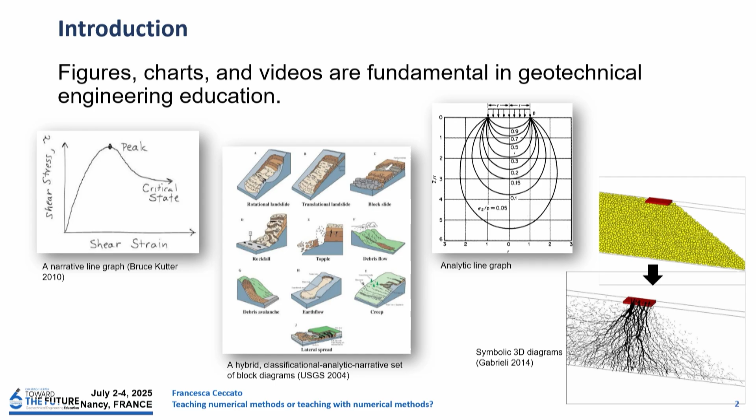Thank you very much. So I will start this talk with a question. This is a question for you, and I think we are progressing with the topic that we just saw in the previous talk. So all of us know that currently in the teaching of geomechanics, but engineering in general, figures, charts, videos are fundamental. And not all teachers are satisfied with the material they have for their lesson.

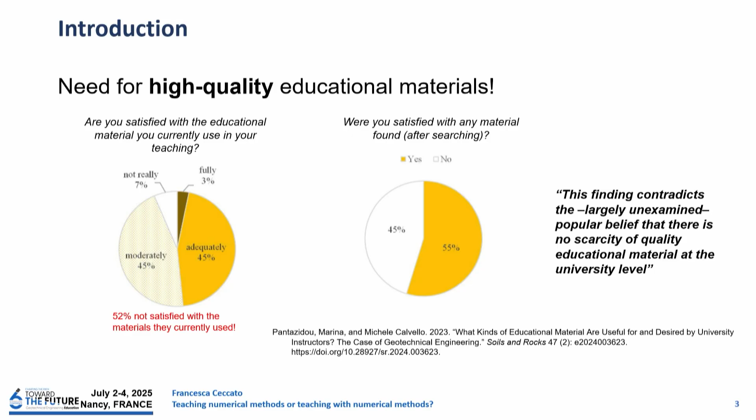Marina showed yesterday that more than 52% of the teachers are not satisfied with the educational material they have. And even after searching on the web, they cannot find useful material for their classes. So these findings contradict the popular belief that there is no scarcity of quality educational material at the university level. So we need that. So building on this, a collaborative initiative was launched between TC306, Geo-Engineering Education, and TC103, Numerical Method, to address these gaps.

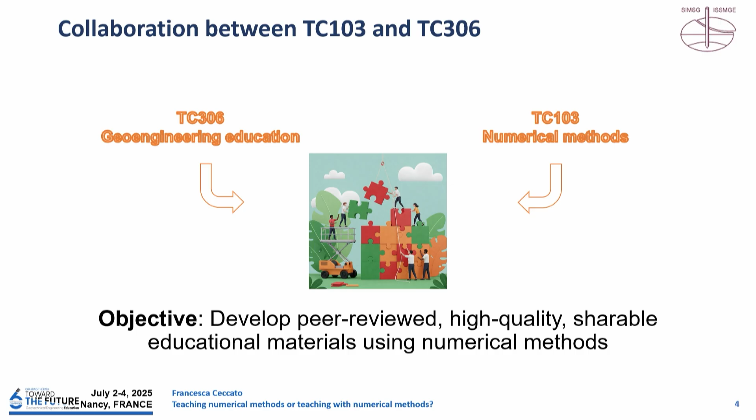So the objective is to develop peer-reviewed, high-quality and shareable educational material by means of numerical methods, material that could be used also in introductory courses. So the working group is still in the early stages of this effort, and we decided to start with a very small task, so preparing small static figures, but we plan to prepare more in the future. And what you will see today is a preliminary result of this project, focusing on a pilot case study.

This initiative, however, brought another question. Can we use numerical methods in education without teaching the underlying mathematical details? Think about it, and we'll come back maybe later in the discussion. So a preliminary survey was initially conducted among all the members of TC103 and TC306 to explore the availability of ready-to-use material that could be immediately shared.

But many instructors said that they have material, we have Excel, I have figures, but this is not ready to be shared, I need to adapt it. So this sentence, I think, confirmed the solitude of teaching, in the sense that everybody prepares his material for his own and it is not ready to be shared with others. And I think we will try to break this.

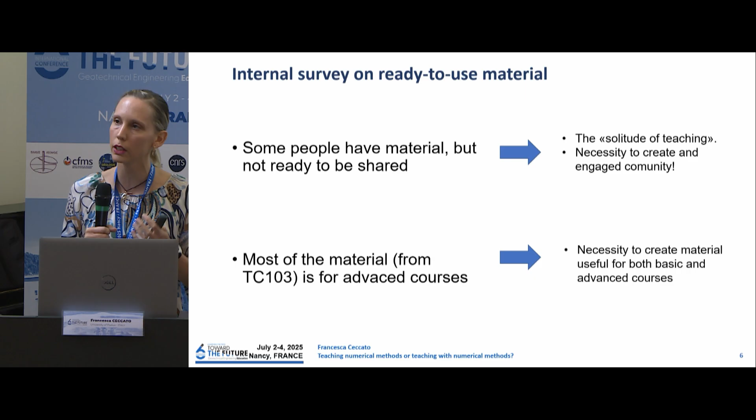Another point that came up from this survey is that most of the material, especially that coming from TC103, is prepared for advanced courses, and people want to keep using it for advanced courses. So this means that if we prepare material, it would be good to have material useful for both basic and advanced courses.

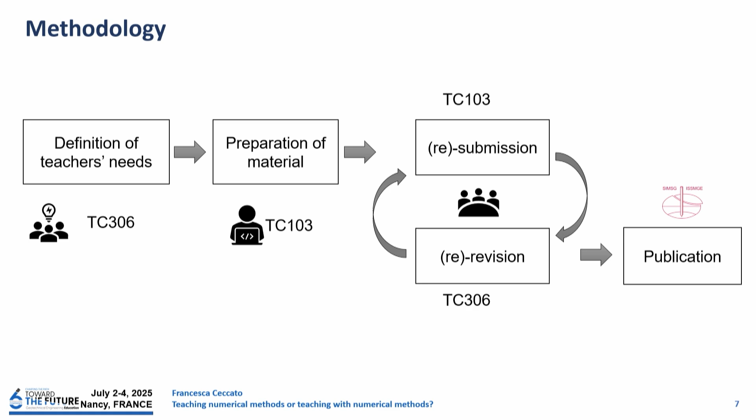So during this project, I think we set up a good methodology. I mean, it could be improved, but the idea is that first, we need to define the teacher needs. And this was done within TC306. Then these teacher needs are passed, in this case to TC103, but it depends on the needs, to prepare material to address these needs. And the material is then submitted and reviewed like we do in research, okay? When the material is ready, it will be published online, in this case using the website of ISSMGE.

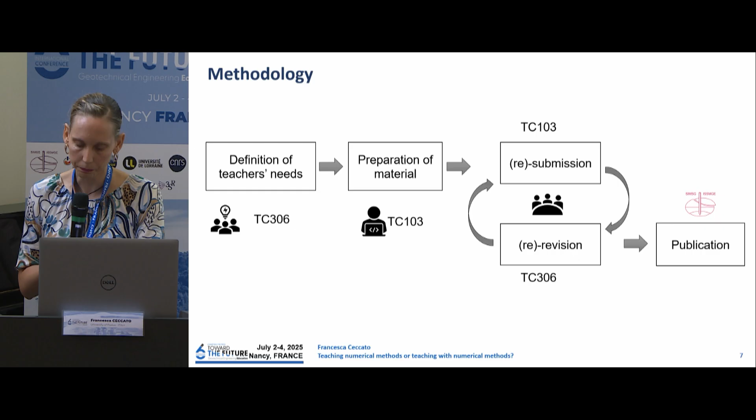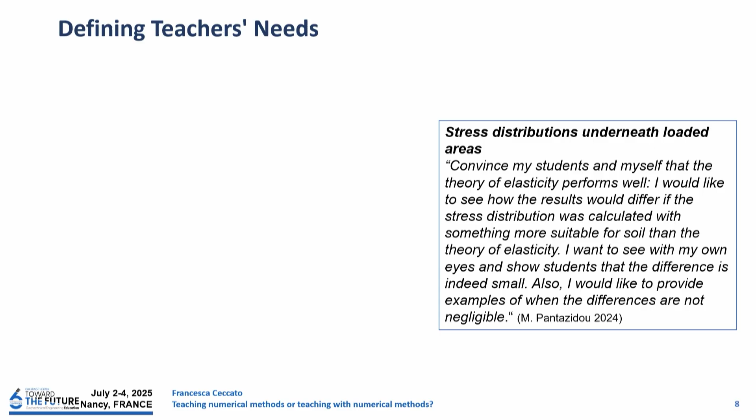So let's see a little bit more in detail what we did. So first, TC306 collected the teacher needs. Teacher needs should be precise. This is the one that I specifically addressed for this pilot case study. I will read it. So the topic is stress distribution underneath loaded areas. So the teacher says, in this case Marina, but many of you probably took part in this project.

I want to convince my students and myself that the theory of elasticity performs well. I would like to see how the result would differ if the stress distribution was calculated with something more suitable for soil than the theory of elasticity. And I want to see with my own eyes and show students that the difference is indeed small. But I also want to provide examples when the differences are not negligible.

So this teaching need is well written, but to generalize, I think that the teaching need should always identify the specific topic or concept, stress distribution under a loaded area, and explain the current challenge or gap, because who will address this need is also a teacher. So you need to understand this material is used for what, to teach what to the student. So students need to be convinced that the theory of elasticity can provide reasonably accurate results.

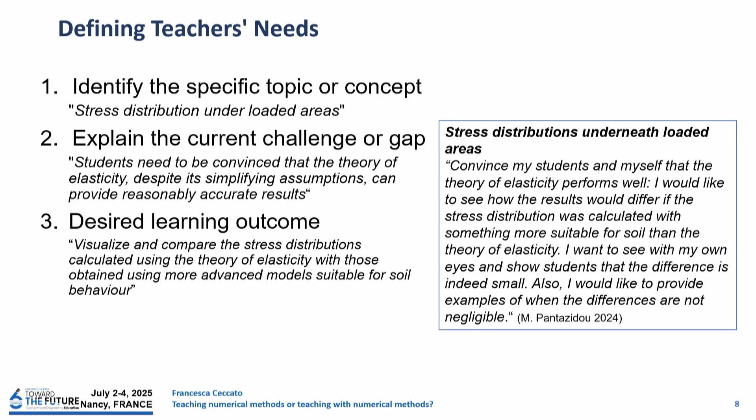And what is the desired learning outcome? So I need something to help my students visualize and compare stress distribution calculated with elasticity or FEM.

Then it is also useful to have some context, so how you believe this material will be used, or examples where the concept is important to be applied, and also eventually potential formats or approaches. Let's say I want an Excel sheet, I want a colorful figure, or something else.

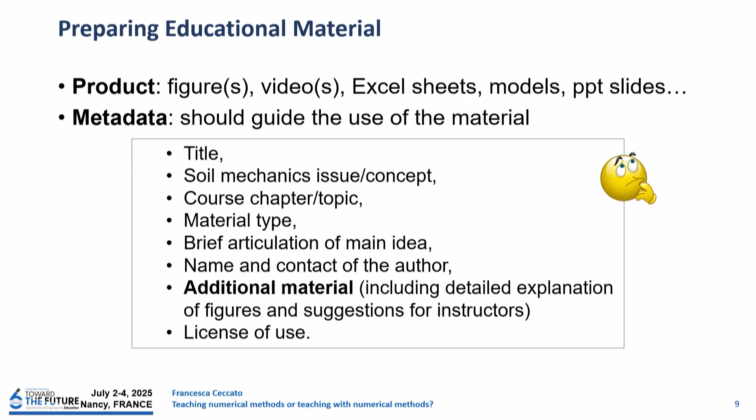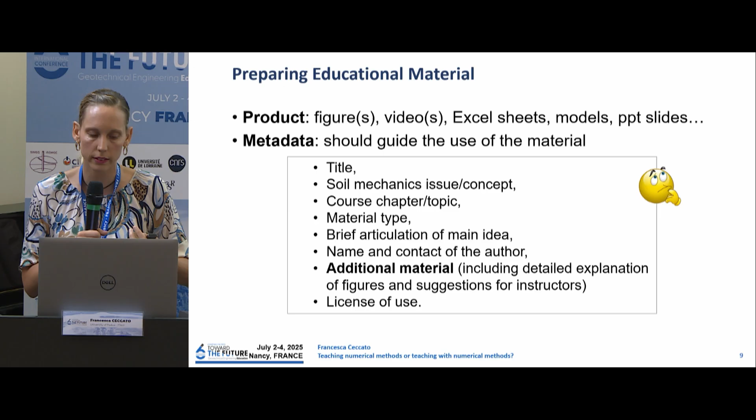Then the material is prepared, and preparing educational material means two things: preparing the product, that is the figure, the model, the Excel sheet, or whatever it is, and the metadata. Metadata is what guides the use of the material. This is a Word file at the moment, and at this specific stage of the project, it contains information about title, the concept of soil mechanics, the articulation of the main idea, and then additional material that is a detailed explanation and suggestion for instructors, and then of course the license of use, that is CC BY in this case. But I think that this should be improved.

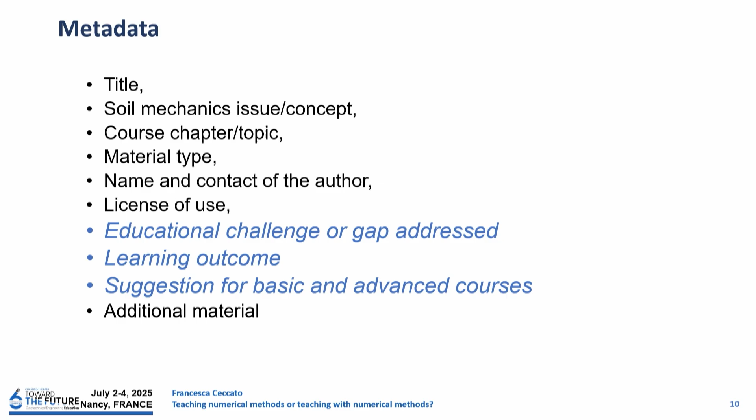In particular, I think that metadata should more clearly indicate what is the educational challenge or the gap addressed with that material. What is the learning outcome? So what do you want the student to learn with that? And also suggestions for basic and advanced courses. Then the material is peer-reviewed. I think that also in peer review maybe we should structure a little bit better what this peer review should do.

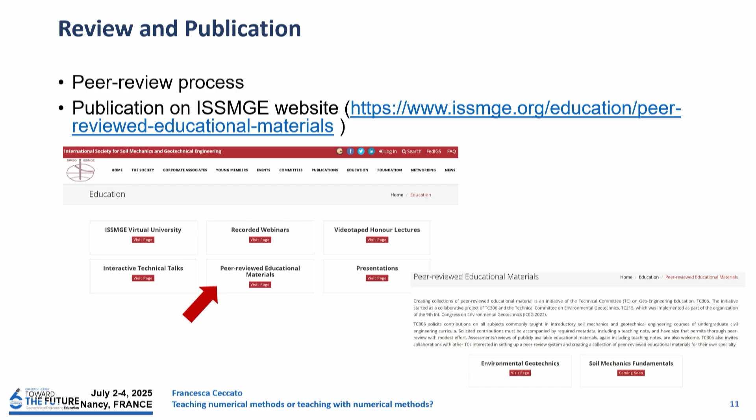And then the material is published on the website of ISSMGE. In particular, we have a section here, peer-reviewed educational material. And inside there is already some material from the TC on environmental geotechnics. And then there is a new one, soil mechanics fundamentals, that will be published during this project.

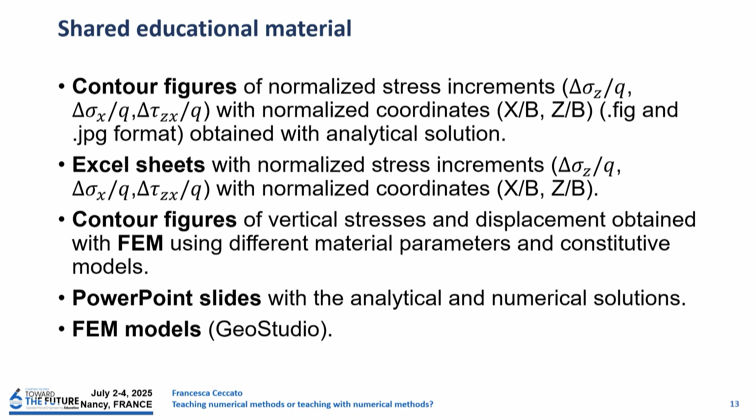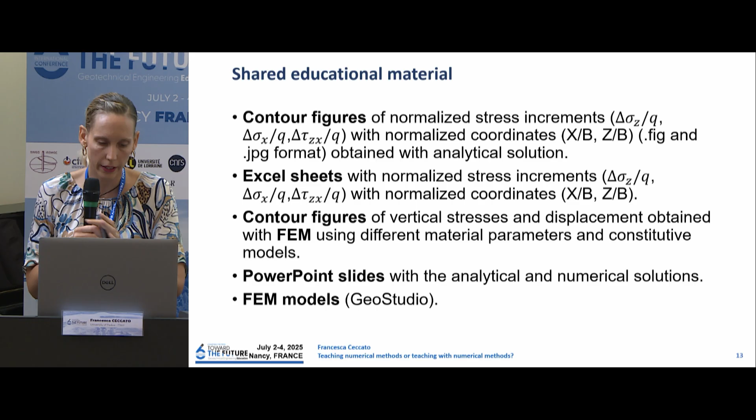Okay, let's now move to the results of this pilot case study. These products can be downloaded from the supplementary file of the paper and on this link. So the product in this specific case is contour figures of normalized stresses, an Excel sheet, some contour figures obtained with FEM, some PowerPoint slides that maybe can be ready to use for a lesson, and all the FEM models.

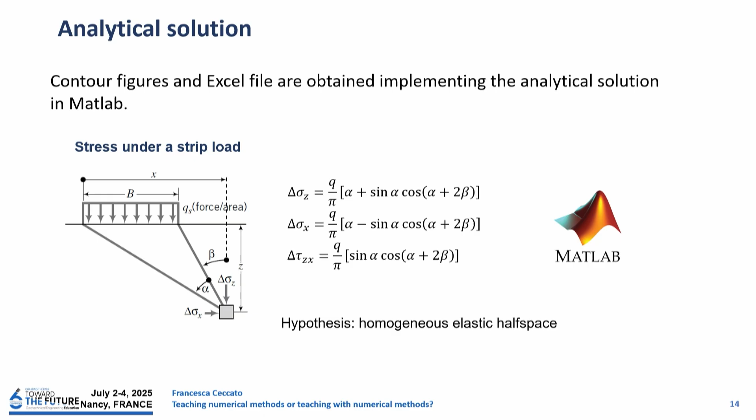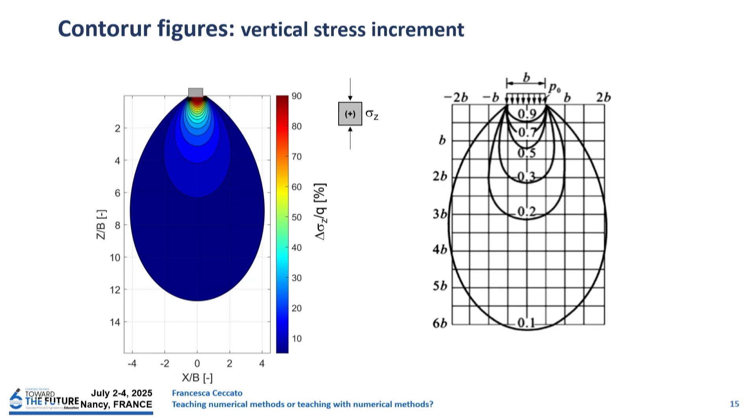So the first step is the preparation of contour figures of the analytical solution for the stress under strip load. So what I did is to implement in MATLAB the equations of Boussinesq theory that are valid for a homogeneous elastic half space. And this is the product, so a colorful figure that can maybe in some cases replace black and white figures from the textbook. Maybe some students now could find it more appealing or more clear.

There is also a figure for horizontal stress and shear stress, and the results of this figure are also written in Excel, and this Excel can maybe be used to create additional figures for classes or to give assignments to the students.

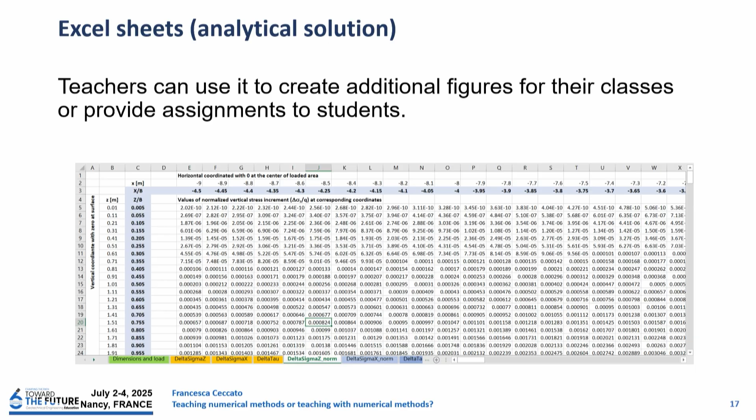I'll open the Excel file, so this is the folder that is provided as supplementary material. Ah, okay, wait, how can I do that? Right, okay.

This is the supplementary material. As I said, there is the Word file with the metadata, PowerPoint slides that are similar to those that I will show, and the Excel file. The Excel file contains the results for the stress increment under strip load.

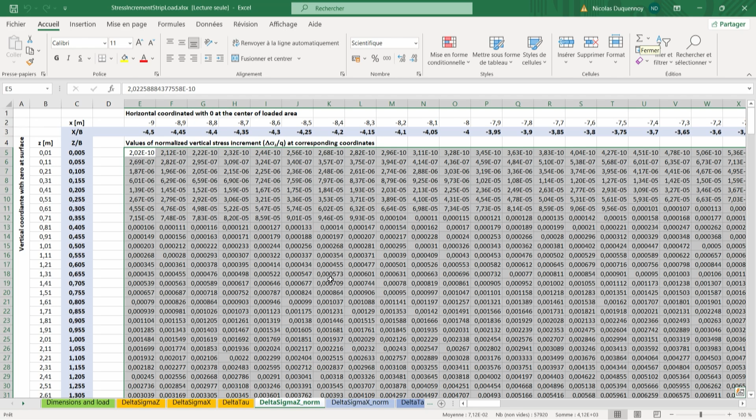So there is the dimension of the foundation and the load, and then the spreadsheet in yellow contains the increment of vertical effective stress, horizontal or shear, with the normalized horizontal coordinate or the normalized depth, and the depth in meters automatically adjusts with the size of the foundation. And there are the same things for the normalized quantities. You can use it to create other figures and so on.

Let me share again. Right.

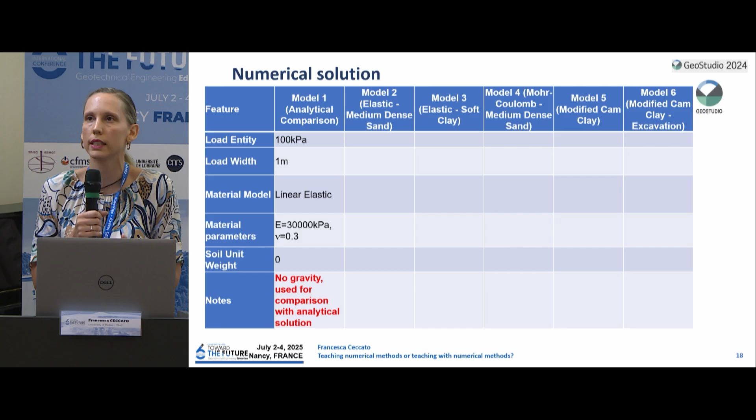Okay. Then there are the numerical models. I used GeoStudio 2024. It is proprietary software that is quite expensive, but the good point is that you can manage very well the output in terms of color, labels, etc., better than other software from my point of view. The models are shared, so those of you that are familiar with the model or that are running advanced courses with finite elements can use them.

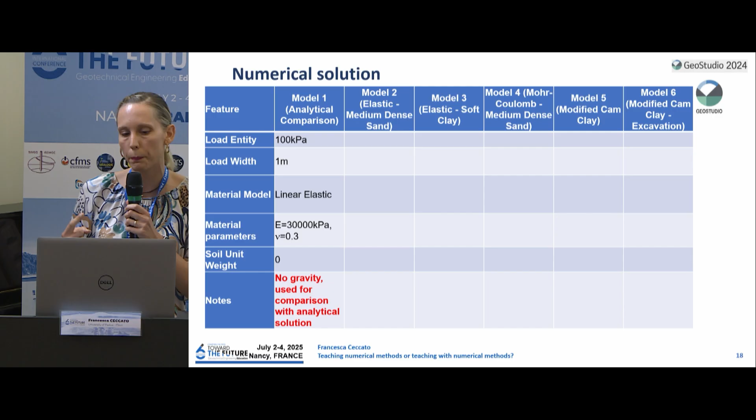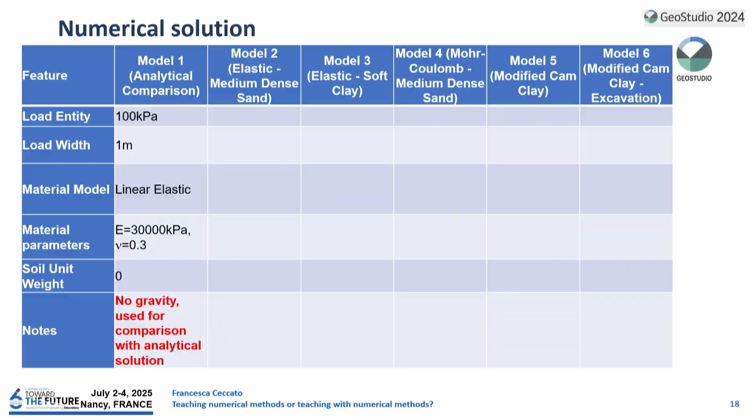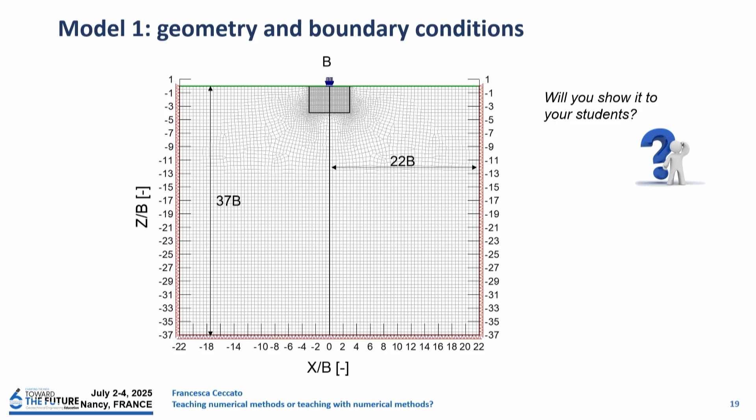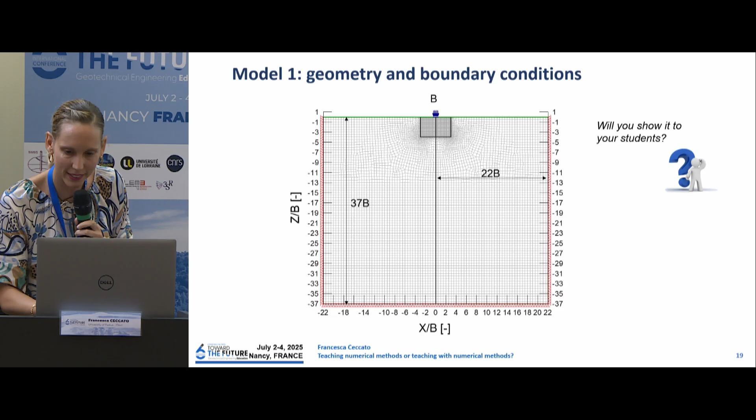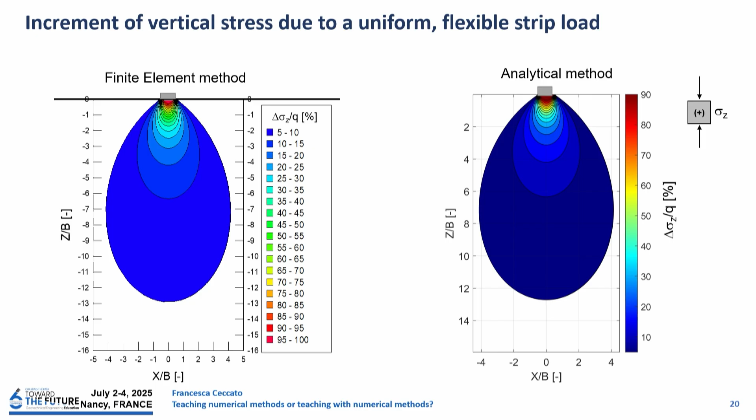I'm showing this to you because I have to prove to you, the teachers, that the model is built in a proper way, right? So you can trust what they did. So these are the results in terms of vertical effective stress increment, and you can show it to convince students that these two models give the same result. And this can build some confidence in the analytical solution, but also in finite elements.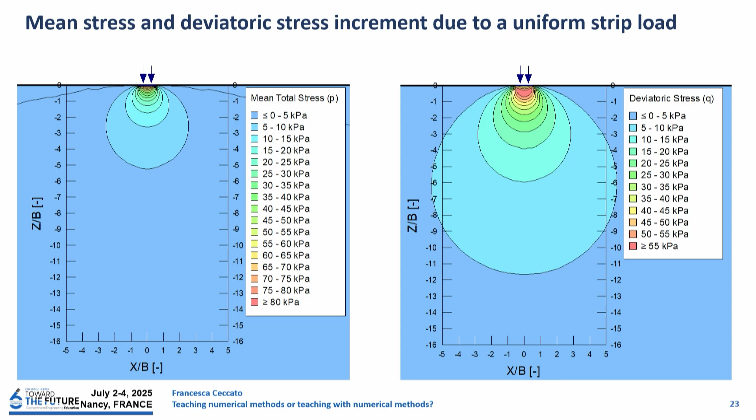And this is done for vertical stress, horizontal stress and shear stress, and then with FEM it's very easy to get also whatever you like, mean total stress, deviatoric stress, and so on. But I got the good result because the model, as I showed you at the beginning, is properly done, because the boundaries are far enough, okay? Boundaries are far enough, 22B is quite a lot, okay?

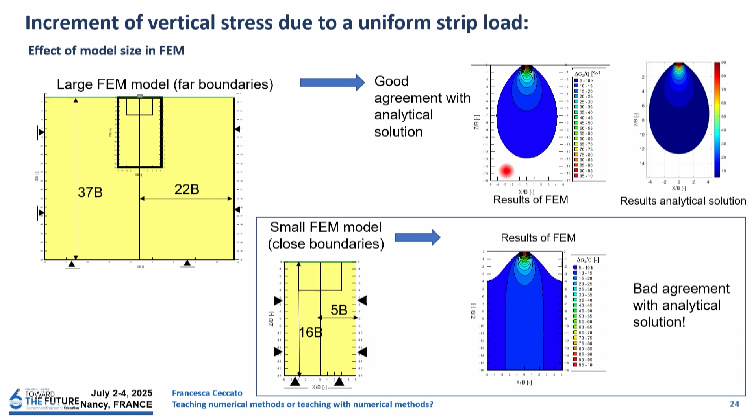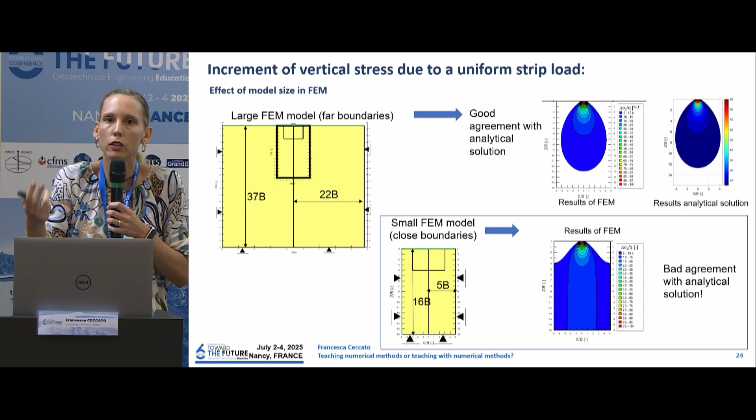But if I wasn't so careful in the boundary condition, as we saw before, I couldn't get a good comparison with the analytical solution. Because if I put close boundaries, I don't get anymore this shape of the pressure bulbs, okay? But this model is not that big, because 5 times the size of the foundation, I think many engineers could think is a reasonable size, okay? So maybe this is also something to show students to promote critical thinking and show the limitation of the model.

So, model 2 and model 3 use, I think, a bit more realistic geometry and size of the foundation. Now there is gravity. The difference between the two is the Young modulus. So these are used to show students the displacement, basically. So the importance of the stiffness of the soil. One model has a Young modulus of 30 MPa that could be similar to a medium dense sand, and the other one, model 3, 1000 kPa that could be very soft clay.

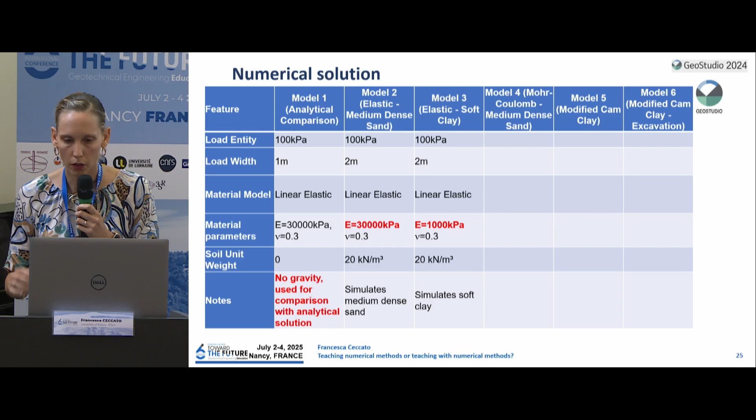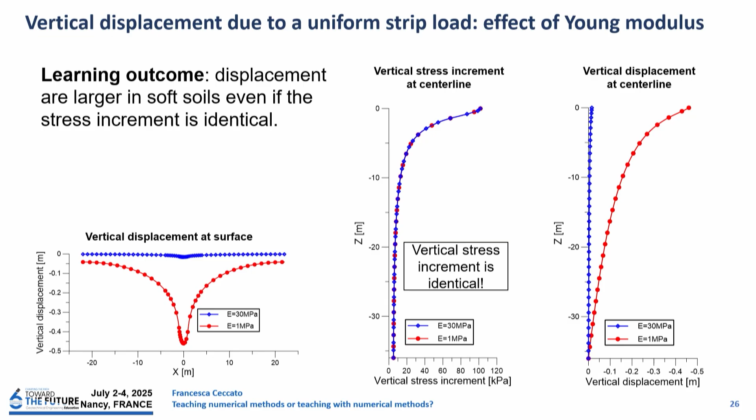And these are the results. So what you can show to students is that the vertical stress increment at the center line just below the foundation is identical in the two cases, but the displacements are totally different because the stiffness is different. So the learning outcome in this case is that we want to show students that displacements are larger in soft soil even if the stress increment is identical.

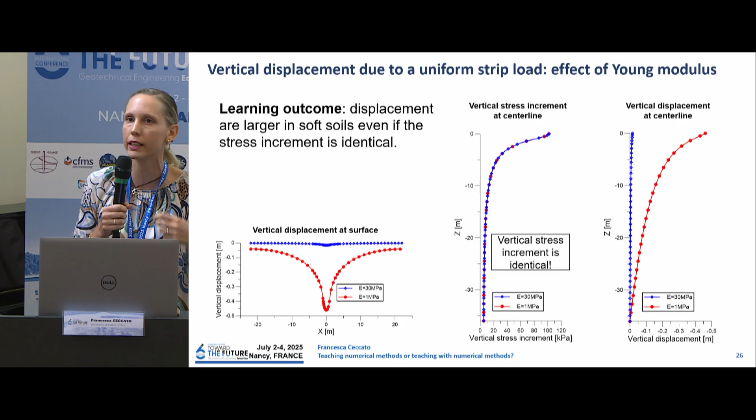Now be careful that this result, to students and also to you, might sound trivial, obvious. So this means that you don't have to show the result immediately, but maybe encourage some thinking before. How much do you think the displacement would be if I reduce the Young modulus 10 times or something like that?

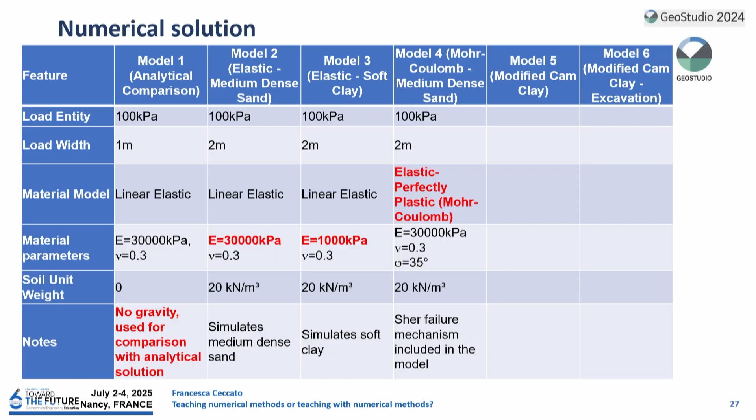But then one can say, okay, but this is linear elasticity, no soil is linear elastic. Okay, then what other model can you use? I'm sure that some student will say, we use Mohr-Coulomb, right? Okay, Mohr-Coulomb is not an advanced model. Elastic-perfectly plastic models with Mohr-Coulomb failure criterion are often adopted to simulate the behavior of coarse grained soil. So let's use this model 4 with Mohr-Coulomb with friction angle 35 degrees, and let's use it to calculate displacement.

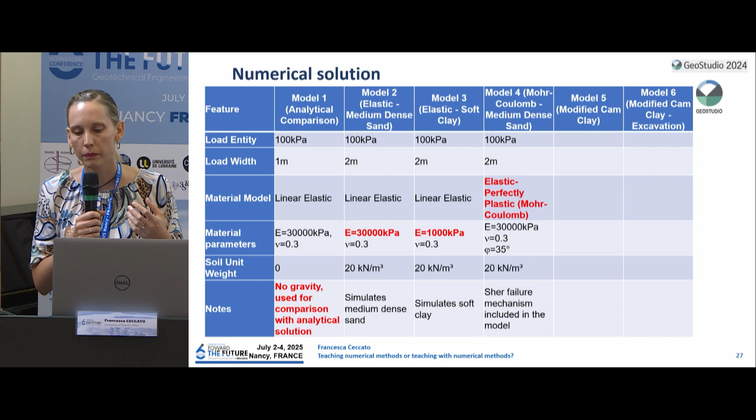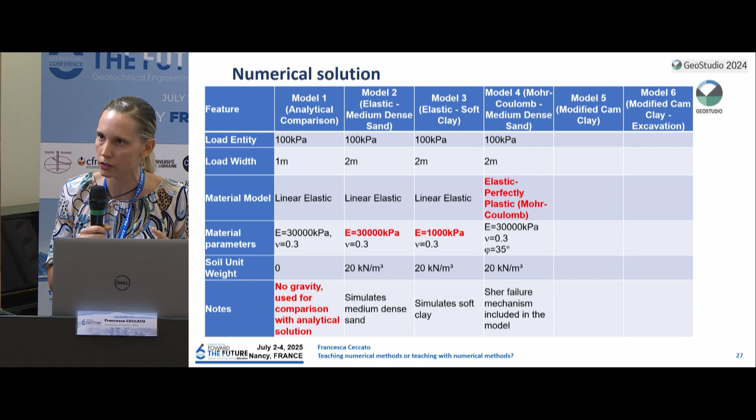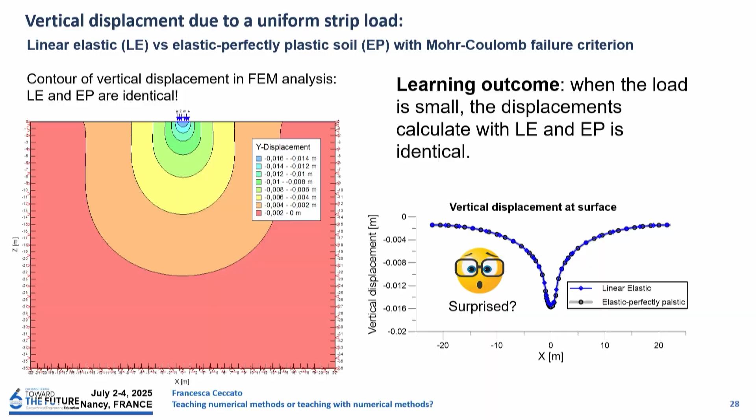Now, when we use FEM in practice to calculate displacement, the load is far from the bearing capacity of the foundation, right? Because we are at the serviceability limit state, okay? So, if we do this, we can see that the displacements calculated with Mohr-Coulomb are identical to the ones calculated with linear elasticity, because the soil does not plastify, does not break, because we are calculating settlement of a foundation. So students should learn that this model seems more advanced, but for this specific application, it is not.

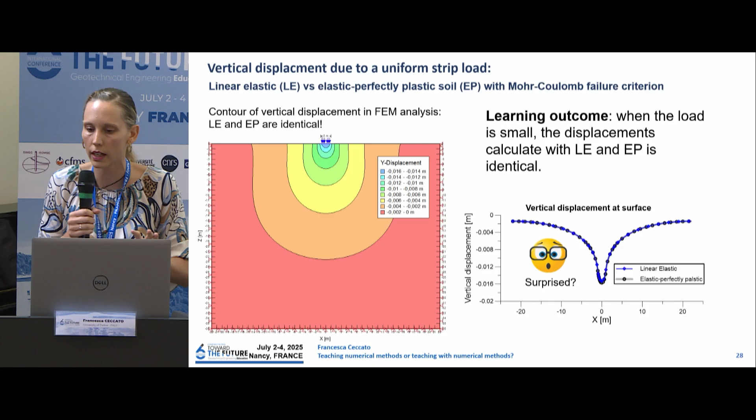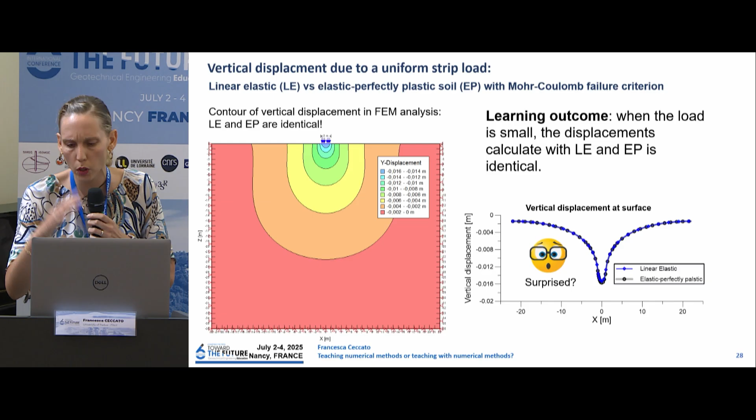And that you have serviceability limit state and ultimate limit state. Okay, and these are two different aspects to be considered. So you can encourage thinking and learning of the student on this type of aspect. Okay, so Mohr-Coulomb, okay, I understand. It was not so good for displacement. Maybe let's move to something more advanced. Let's say modified Cam clay.

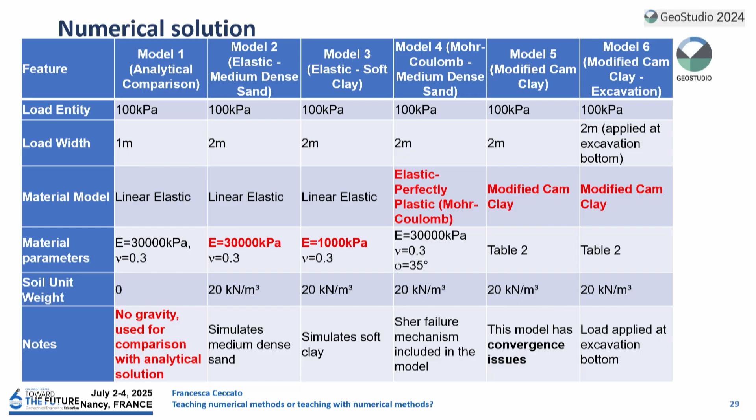Okay, so I did model 5 and model 6 with modified Cam clay. Model 5 is identical to the previous one with the geometry, load, and so on, just changing the constitutive model to the modified Cam clay. Well, this model does not converge because it has the load applied on the surface. With this parameter, you have convergence issues. Okay, so in FEM, it won't converge.

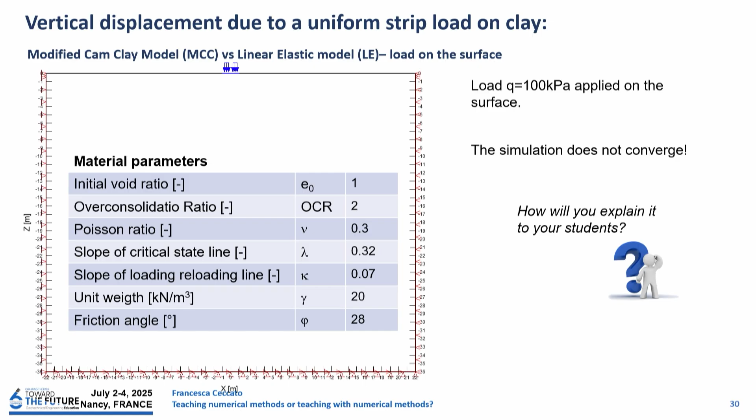How will you explain this to your students? Now, this is a question that I asked myself. How can I show my undergrads, who maybe know a bit about Cam clay, that this model does not converge? They probably need something more on the background of finite elements to understand it. Or maybe you won't show it, right? I won't show the model that does not converge. But in this case, I think that maybe students should find a solution. If the model does not converge, what can we do?

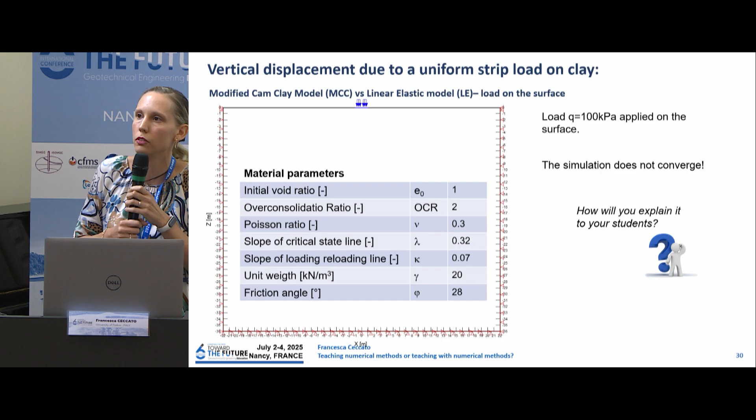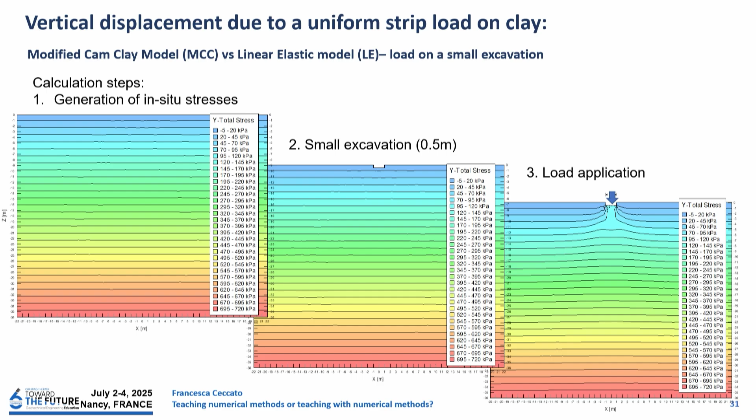So there are several possibilities. One easy one is, well, we never build the foundation just on the floor. There is always a little bit of excavation, at least, right? So let's try with a bit of excavation. So we prepared another model with this small excavation, so all the construction steps: generation of in situ stress, small excavation, then load application.

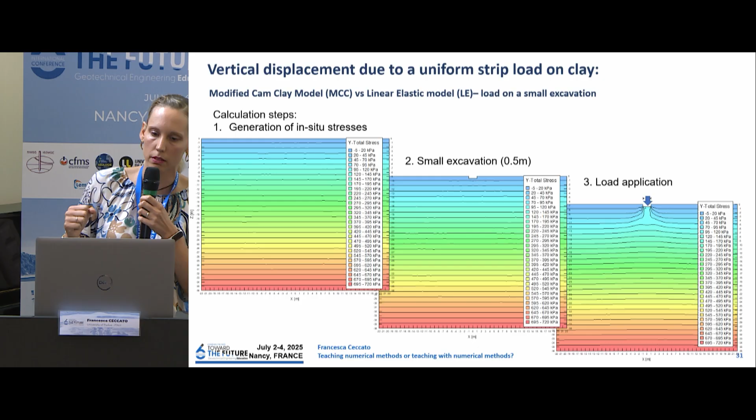Now this model converges, and these are the displacements obtained with the modified Cam clay compared with the linear elastic model, the one with the soft clay, 1000 kPa for elastic modulus.

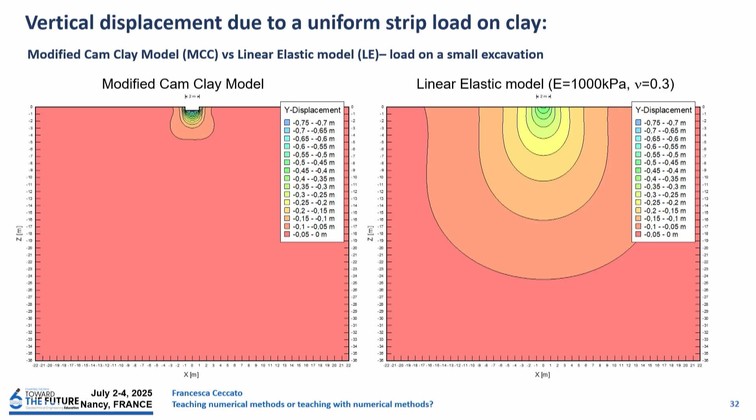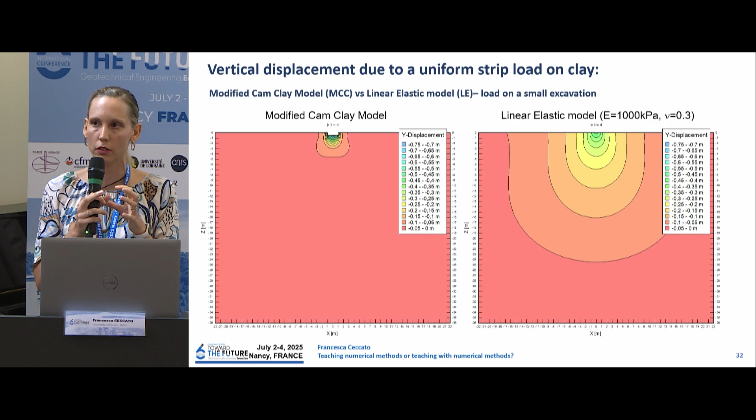Totally different. So here, I think it's practically useful for the student to understand the effect of plasticity, because the displacements are much more concentrated next to the foundation compared to the theory of elasticity, and this is something that we know is happening in reality, okay? And it has some practical implication.

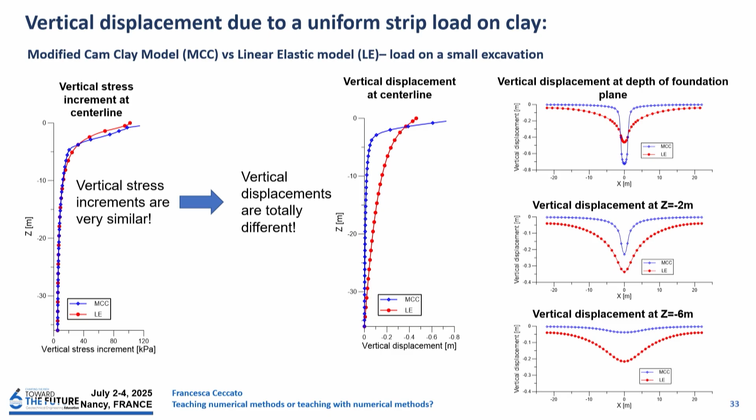So now you can show, for example, to the student that even though the vertical stress increments are similar, the displacements are totally different. But this also tells you that the theory of elasticity is still doing a good job to calculate the vertical stress increment, right? So it builds confidence in the analytical methods, okay?

Then, how to use this material in basic courses? I think it can be used to enhance the student learning experience. They can probably improve digital literacy, improve fundamental understanding of soil behavior through better visualization. And I think it's very important to promote critical thinking.

How to use it in advanced courses? Again, comparison between numerical model and analytical solution, show things that don't work, to promote critical thinking, promote discussion with students, show model limitations, because it's important. I mean, the model is not good or bad, it depends on reality. It depends on what simplifications are introduced in the model.

Then, of course, in an advanced course, you can prepare assignments based on that, ask the student to implement the model, to do parametric or sensitivity analysis, to get a little bit more confidence with the numbers.

So preparing this educational material requires a lot of effort. For this specific case study, implementing the MATLAB code is more or less 1.5 hours. Preparing all the FEM models is about 2 hours. I mean, for the 6 models: open the program, draw the geometry, make the mesh, assign the parameters, run. All of them, a couple of hours.

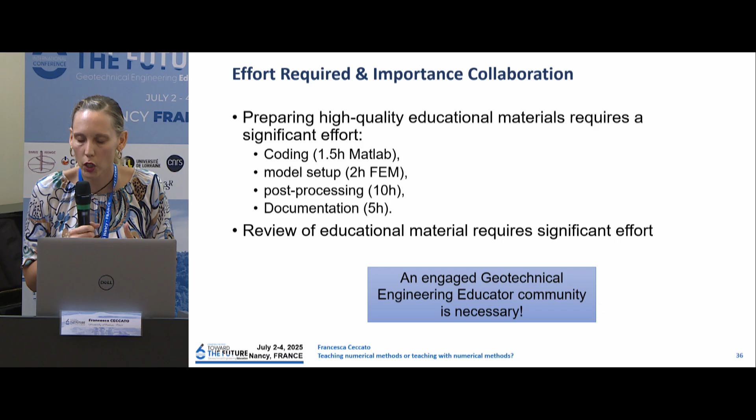So really, the numerical part is a small amount of hours, but the post-processing takes a lot of time, really a lot of time, because in MATLAB I have the contour. Oh no, the labels are too small. No, the colors are not good. Maybe I add a line here and there. I chose GeoStudio because it helped me prepare nice figures that I believe are good for students. At the beginning I tried another software, but I couldn't really make nice figures for students. So preparing good figures out of these results takes a lot of time.

And then, of course, writing the documentation takes a lot of time. I didn't mention, but the people that review this material also spend some time to check and give suggestions. In this case, Marina and Michele, whom I thank. So they had to spend time to look at this material. So no teacher has all this time available for one single topic. But if we take on this effort as an engaged community of geotechnical engineering education, I think it is probably doable, okay?

So to conclude, I showed you this collaborative initiative to prepare high-quality educational material. This requires significant effort, but if we undertake this as a community, I think we can mitigate the solitude of teaching and improve the quality of our teaching.

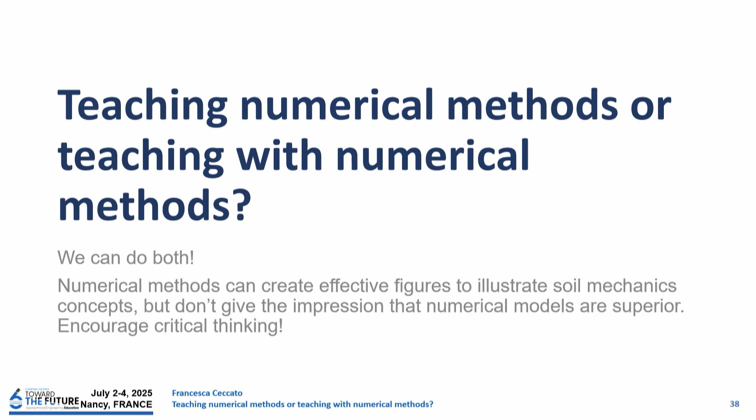So finally, teaching numerical methods or teaching with numerical methods? I think we can do both, in the sense that numerical methods can create effective figures to illustrate soil mechanics concepts, but please don't give the impression that numerical methods are superior. Always encourage comparison with analytical solutions, as we said earlier, and encourage critical thinking.

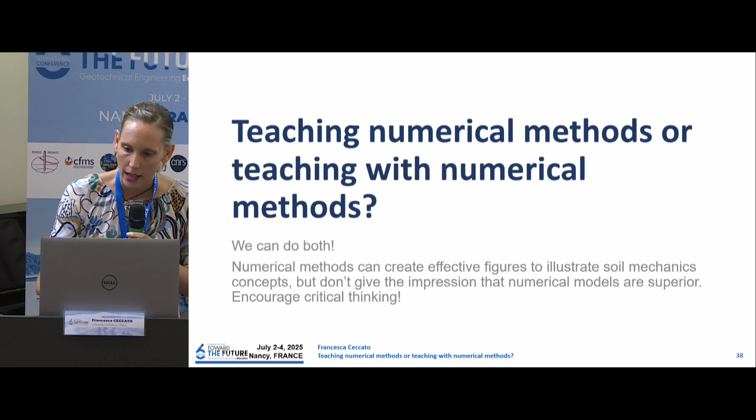And can we use numerical methods in education without teaching the underlying mathematical details? Maybe, but I'm not 100% sure of that. For sure, never ask students to believe the result. So don't say, oh, this is the result of the FEM model, use it to compare, and they believe it is the correct one. They should at least know a little bit what is behind, okay, because it's important.

But this can also be used to encourage the curiosity of the student. So what is behind? Maybe you don't have to teach them. They can do it themselves. So encouraging curiosity might also be good.

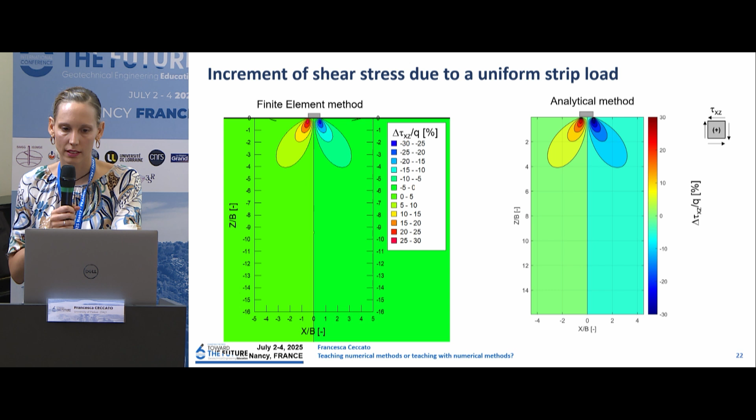Yeah, I see your point, but I think we can use numerical methods for other, more complex problems, and then use concepts and mathematics or basic ideas to argue that sometimes you don't need numerical models to show that. Of course. It's just a comment. No, okay. But it was addressing a specific teacher need. Maybe there are others that are different, right?